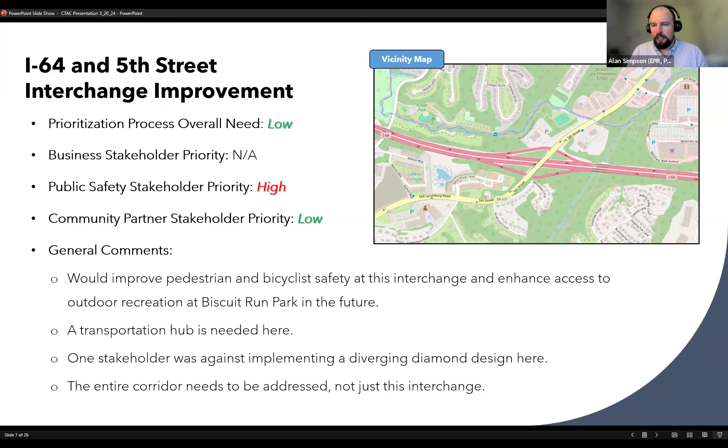So this project, general comments there were, it would improve pedestrian and bicyclist safety at this interchange and enhance access to outdoor recreation at Biscuit Run Park in the future. We heard comments that a transportation hub is needed here. We had one stakeholder who was against the idea of a diverging diamond design here. And we had a comment that the entire corridor needs to be addressed and not just this interchange. So that's the feedback we heard in the stakeholder meetings on this project. If anyone has questions as I'm going through, please feel free. I'm going to move on through, and we can discuss at the end if there are no questions as I go through.

So the Rio Road peanut-shaped roundabout and shared use path. So that's here, the intersection of Rio and Hillsdale and Old Brook Road and Northfield Road. We identified that as a high/medium priority based on the metrics that we looked at. And the public safety stakeholders, interestingly, didn't have a lot to say about that one. They didn't find it a high priority, but the community partners definitely did. And so the business stakeholder group didn't really give us a priority level on that one, but they did feel that speed was a concern on this corridor and that there's a need for safety improvements.

Our community partners were very concerned about safety concerns and deaths at this intersection and a lot of issues with biking safely along the Rio Road corridor. Interestingly, the public safety stakeholders didn't feel that there were many issues here, I guess, compared to other parts of the road network. This didn't seem like a high priority, but it definitely did for our community partners. That is puzzling, given that that's supposedly the most dangerous intersection in the state. Yeah, it is interesting. I mean, it's a small sample of a four-person stakeholder group, but I guess to them, maybe it's not something that they used often or weren't that familiar with, but yeah, I agree. It definitely seems like a problem area.

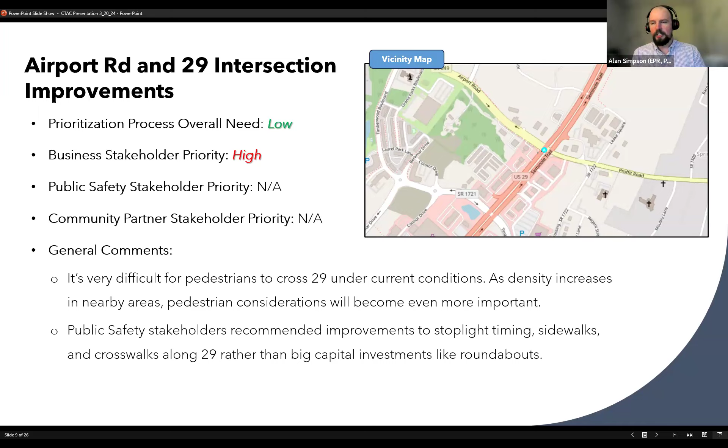Airport Road and 29, so intersection improvements there, identified as relatively speaking a low priority. Business stakeholders said that was a high priority. The other two groups didn't have a lot to say in terms of the priority level. They agreed with what we had in general. So general comments, I think a lot of us know it's difficult to cross 29 as a pedestrian under current conditions, and with density increasing there in the future with more development, that's going to become even more important. So just a general support for improvements at this intersection. Our public safety stakeholders prefer to see things like stoplight timing improvements, sidewalks and crosswalks, rather than a big capital investment like a roundabout. So that's something to consider.

The Ivy Road corridor, this is a long stretch, and the overall need was low for our prioritization process. But the stakeholder groups thought this was a much higher priority in general. Business stakeholder groups were kind of looking at it from a business standpoint, or we asked them to. So they said it would be essential for tourism coming in and out of the city and to the county there. Our public safety stakeholders, especially fire and rescue, mentioned flooding and congestion issues along this route. And our community partners were definitely interested in a shared use path along Old Ivy Road to improve walkability.

The US 250 corridor out in Crozet, we're looking at where 250 passes by Henley Middle and Brownsville Elementary. Our public safety stakeholders thought this was a high priority. They definitely thought it was a higher priority than what was identified in the data gathering process. Pedestrian access at Brownsville Elementary and Henley Middle was cited as a challenge. They're saying that sidewalk access on nearby roads is inconsistent. They stop and start in kind of random places, not so easy to get to on foot. There was mention of a potential roundabout design. There was some concern that could be confusing for bus pickup and drop off.

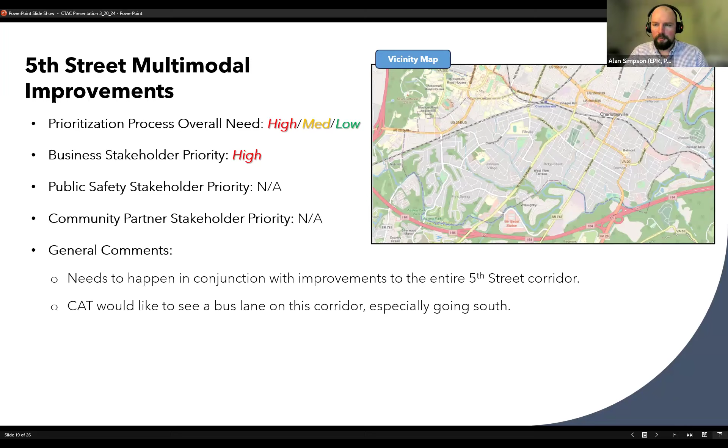For the Fifth Street multimodal improvements, you'll see 3 need categories there. That's because the data analysis process looked at each individual road segment. So there were some road segments that were high need based on congestion, public safety, pedestrian safety, that kind of thing, and some were less so. But in general, it's a high priority corridor. Business stakeholders definitely agreed. The other groups didn't have a lot of feedback on that one, but commented that the multimodal improvements are important, but they need to happen in conjunction with improvements to the entire corridor as a whole. Our representative from CAT said that they would like to see a bus lane on this corridor, especially going south.

For Preston Avenue multimodal improvements, that's one that was identified as a high, medium need, depending on the road segment. So overall, a high need. There was agreement with that from the stakeholder groups, at least the business stakeholder groups. Just a comment that the 10th Street intersection is confusing. The Hillsdale South extension, that one was identified as a high need, and there was agreement from the business stakeholders.

You're seeing a lot of NAs on this list. Some of these groups, we honestly ran out of time to talk about everything, and at a certain point we had to ask, take a look through the list. If there's anything that jumps out at you or that you want to discuss before our meeting's over, we'll do that. So some groups didn't get through the entire list in the meeting, and we didn't hear much feedback from them afterwards. So there were some projects that didn't get a lot of feedback, but didn't have any other comments on that one, just some agreement that it is a high need.

And Peter Jefferson Parkway and Rolkin Road access management and pedestrian improvements. That was a medium need from the prioritization process. The business stakeholder group thought it would be a higher priority. In general, there weren't a lot of comments, just something that needs to happen.

And finally, I think this is the last one. The Rivanna River bicycle and pedestrian bridge between Pantops and Woolen Mills. That one was identified as a medium need, basically based on the congestion at Free Bridge. And this is something that was suggested as a way to improve multimodal connectivity in that area, and hopefully relieve some congestion in that way, but also just a way to connect those 2 areas. Didn't have a lot of comments on this one. Not a lot of disagreement, but not a lot of strong opinions.

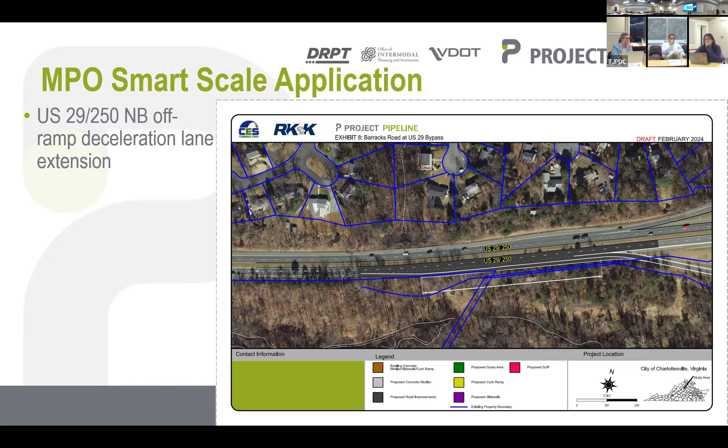And just as commentary, that's one piece of feedback that MPO Tech gave, that if this element is actually not helping with the operations, perhaps removing it can help with the benefit cost analysis that goes into it. Because if you're adding this significant cost but it's not providing benefits to the operations, perhaps it's unnecessary. Correct. And we can come back and put that in if we start to see the queuing start to back up again. But I'm hoping the roundabouts analysis is not showing that that's going to be a factor in the design year, so I think we should be all right.

And this scored really well. Like I said, 62% were supportive of it. So that's why I kept it in. And there was some negative, but not as much as we've been seeing with the roundabouts. Any questions about this one?

The next portion is basically extending the shared use path from the interchange into the city. They currently have 2 projects at Emmett and Barracks where they're running shared use path along Emmett Street from the south up to the intersection, and then they're running shared use path east on Barracks up the hill. So this will basically connect with what they're already proposing to do.

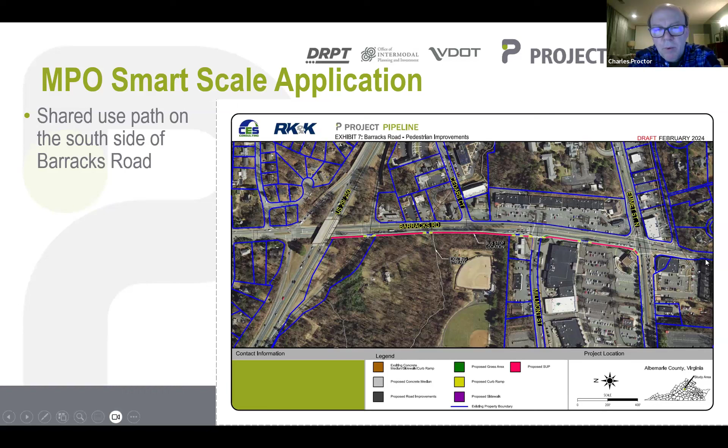And this was well supported too. We had 75% for the portion that basically runs out to the Rivanna Trail, and then the Rivanna Trail to Emmett Street, it was 72%. But even here, we do have some negative comments, but they're not very many. And that's pretty much it.

For the applications, we're looking at 3. The county is going to submit the western portion, and the MPO is going to submit the eastern portion, the interchange and the shared use path, and also the entire package as a separate application for Smart Scale this round. So we're working with them to put those applications together.

I'm working with a consultant to refine a lot of that material. We have to do an interchange modification report, and we're in the process of working on that right now. We've got the framework document that we're getting signed, and then we'll be compiling the information for the report. But we need the framework document as part of the pre-application, which is due April 1st.

Any questions about this? Yeah, I have a question, Chuck. On the slide with the two roundabouts, would it be feasible for the shared use path to go underneath the two ramps instead of being at grade? It's sort of awkward the way it is there. You've got right angle turns, which are difficult for bicycles, plus you've got all the traffic on the ramps moving fairly quickly, which doesn't bode well for grade crossings. Would it be possible to take the shared use path underneath the two ramps instead of at grade?

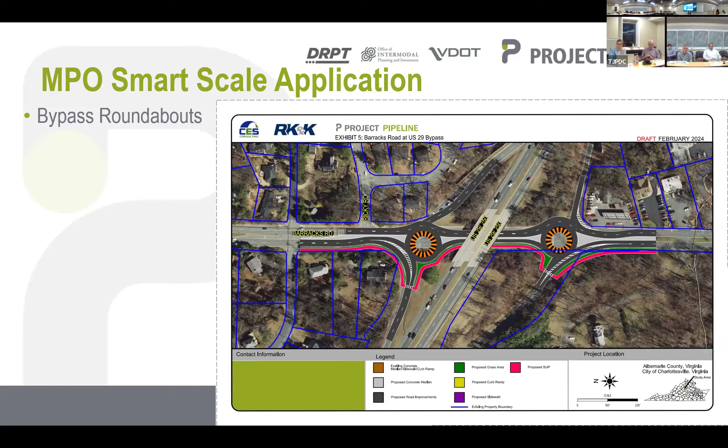Okay, one other question. If the west portion from the interchange to Georgetown Road is completed, you almost have to do at least one of the roundabouts at the interchange so that the traffic that comes out of the side streets and can no longer cross the median has a way to make U-turns, right? Yes, and we don't want to make the U-turn at the interchange. We'll have to have that discussion about how we're going to do that moving forward, because we're splitting up the projects, but we haven't had that discussion yet.

Are you talking about people that live south of Barracks? Well, yeah. I mean, they could go down and make a U-turn further to the east or take a different route, but you're right. If you're coming down Georgetown and you want to access those properties on the north side, you can't do that. On the south side, you can get back to the roundabout because you've got a good network of streets. Right, okay. But the north side, you're kind of out of luck. Yeah, two of the streets do go up there, and there is some interconnection. It's just not as easy as it is on the south side. Okay.

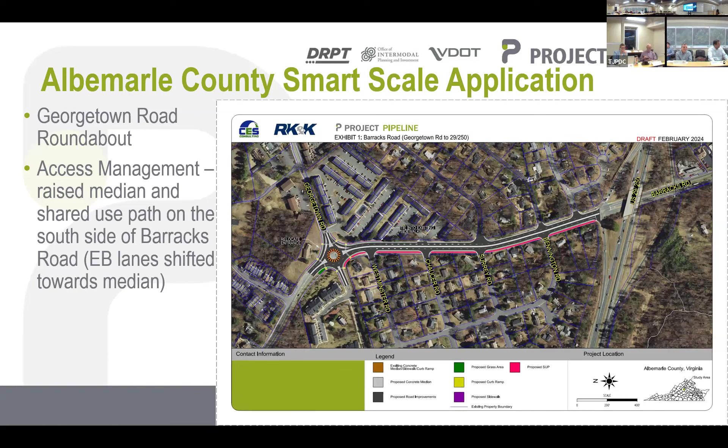All right. Any other questions for Chuck? I actually had a follow-up about where the shared use path crosses the two ramps. What is the mechanism for allowing the bikes to cross the road there? We'll put in at both of those locations probably rapid flashing beacons at this point. At the one at Georgetown Road, we had big discussions about those at the MPO Tech, and they were asking about raised crosswalks and rapid flashing beacons. They've changed the requirements for roundabouts, so they're more stringent than they used to be. So we're going to be looking at all those and making a determination, but at a minimum, we'll have rapid flashing beacons at those crossings.

Okay. Chuck, I know this may be more detail than you are ready for, but what about the transit that runs up that corridor right now? I'm pretty sure the bus stops there are like most of our area: there's a sign there, not a pullout or anything. How is that being addressed? We weren't adding pullouts. If there's signs there, we'll maintain them. We haven't really gotten any feedback from CAT on whether they wanted to provide anything regarding those stops within the project. Typically we can add stuff, but we didn't get any feedback from them to add stuff, so I don't know.

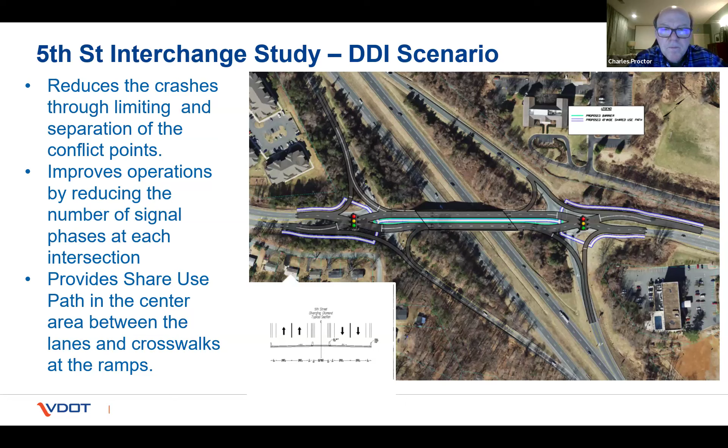No, that's not. All right.

The next projects that the counties or the MPO is going to submit are the Rolkin Road and Peter Jefferson Parkway intersection projects. These were submitted last round in Smart Scale, and they did really well. Actually, Peter Jefferson Parkway was one of the recommended projects to be funded, and the CTB switched the funding for that one over to District Avenue because they felt that was more of a critical need than the other one was here. But basically, this is the concept that we used last round.

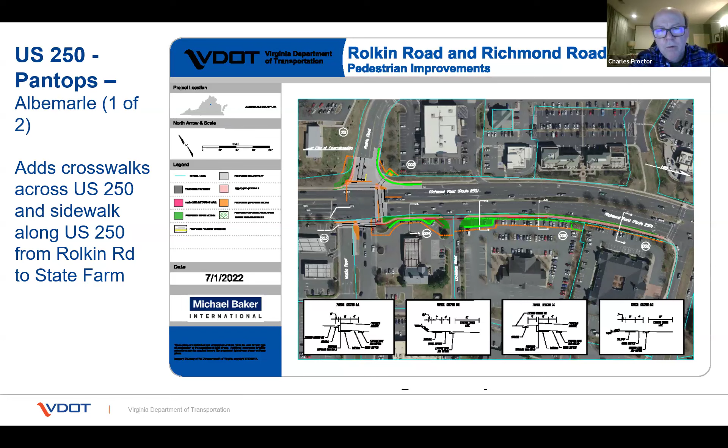We're providing crosswalks at Rolkin Road, and we're adding a sidewalk on the south side of 250 from Rolkin down to State Farm Boulevard. And the next slide is the other portion. This is Peter Jefferson Parkway. What we're going to do is close the one crossover just to the west that provides one of the accesses to the Holiday Inn and the businesses over here and make it a right in, right out

to improve the safety. We're adding a right turn lane at Peter Jefferson Parkway on the eastbound direction, and we're converting the intersection to a through cut, which basically allows the left turns in and the left turns out, but it doesn't allow the through movement across between Peter Jefferson Parkway and Glenorchy. We're also adding a 50 space park and ride lot with a bus loop, which would allow commuter buses to come in, pick up people and go out and either go to the interstate or go back towards Charlottesville.

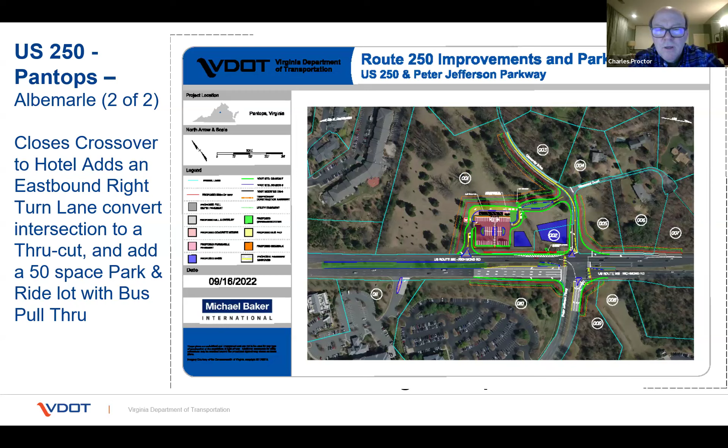That's it for this one. Any questions? No, it's not. All right.

And like we already talked about Barracks Road, the last 2 other applications are the Barracks Road applications. So that's the 4 applications that the MPO is going to be submitting this round. This one is just the interchange improvements and the stuff to the east, which is the shared use path all the way to Emmett Street. Any questions or comments on any of the 4 projects?

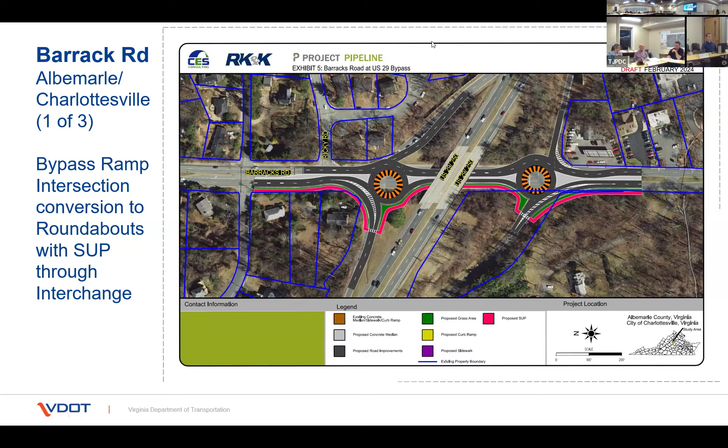No, I think we're good. Yeah. All right. Thank you all. Well, thank you, Tom. Let us know if you have any questions. All right. Thanks, Chuck.

Okay, I guess we'll move on to the Unified Planning Work Program. Christine. Yes. I have the pleasure of explaining the UPWP, as we call it. I think a lot of you are familiar with this, but I'm going to go ahead and do high level just to orient us, to make sure we're all on the same page. So we have to submit an annual Unified Planning Work Program. It's a draft of all the activities that the MPO will do throughout the fiscal year. It is presented to MPO Tech and CTAC and the MPO Policy Board. Policy Board saw it in its draft form first so that they could provide direction. Then we bring it to you all and to MPO Tech to get feedback, and then it goes back to the Policy Board for a final vote in April. It needs to be submitted to the feds by early in May.

Oh, that's weird. Hang on a second, sorry. I might keep it just in this view, which isn't ideal, but we can all see it, right?

There we go. The purpose of the UPWP is to identify all of the transportation planning activities that the MPO staff will do. Federal law does require that we address 8 basic components that are listed here. Don't need to read those to you. That's standard across all MPOs and TPOs, transportation planning organizations. But additionally, CAMPO had identified over time other priorities that they wanted to make sure they were also considering in their planning processes. That's related to things like enhanced transit, greater mobility for seniors and folks with disabilities, really expanding upon those 8 core needs and getting more regionalized and local to what does our community want and what kind of planning activities should we undergo that still meet the federal requirements.

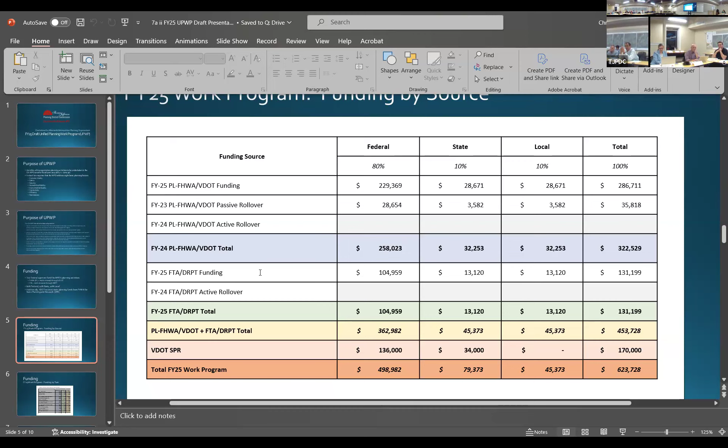These are going to get much smaller as we go, because there's a lot more detail. So basically, we split the tasks into 3 different items. The first one is administration, and that's for the standard items that occur year to year, staffing committees, making sure we're reporting on all of our compliance, all of our reporting, invoicing, things like that, general information sharing, updates, websites, that type of stuff.

This year is slightly higher than last year, and that is primarily due to staff transitions that we're gonna have and cross-training that we're gonna be doing to make sure that we have multiple staff members that understand all of the processes of the committees rather than just one, so that when we have a turnover, we don't have to then retrain, which happens at all MPOs.

The second task is the long-range planning. The major buckets within this for this upcoming fiscal year will be to support the comprehensive safety action plan. There's $50,000 allocated to that. That's particularly to support Charlottesville and Albemarle and to help them identify projects for implementation to be able to apply for Safe Streets and Roads for All implementation funding.

The second line item there is travel demand management study. This is at direction of the policy board. Through a lot of the long-range transportation plan, we heard a lot about reducing cars in the urban area and having strategies long-term for how we are going to get a more walkable, bikeable community and how we are going to do things like road diets, but we have to do something with those coming in from outside of the urban area.